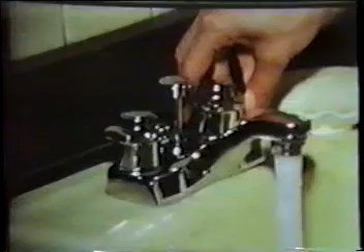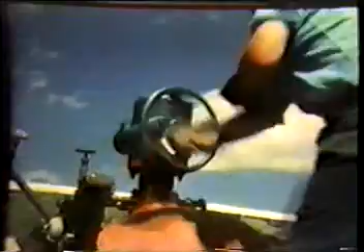Most people are familiar with the annoying sounds of water hammer, the effect of abruptly stopping the flow of water by closing a faucet. In large-sized transmission and distribution pipelines, closing a valve too fast can cause water hammer. The sudden deceleration quickly transforms the momentum of a column of water into extreme pressures in the pipe.

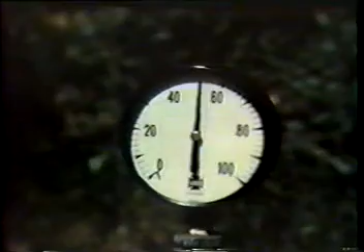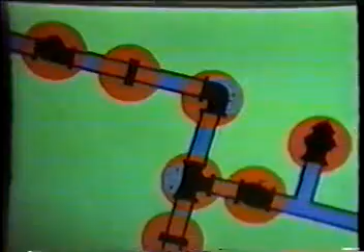This pressure in a pipe system can damage pumps, couplings, thrust blocks and elbows, pipe walls, valves, boilers, hydrants. In fact, the system can be subjected to stresses greater than its designed structural capacity, its ultimate strength. This applies to all kinds of pipe materials: cast and ductile iron, steel, asbestos cement, concrete, and plastic.

Water hammer is the concern of those who stand to gain the most from the elimination of such effects. The contractor, who must meet the specifications and who wants the least uncertainty in his installation. The owner, who as guardian of public funds wants the most value and maximum system effectiveness for the taxpayer's dollar. And the engineer, whose reputation depends on good system design.

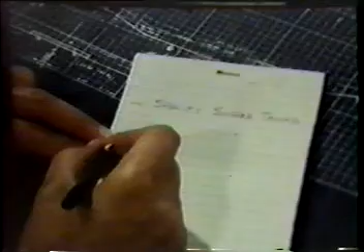Often the engineer will make analyses of the possible effects of water hammer on the system. When he does, he either designs adequate strength to withstand surges, or he reduces the magnitude of the surges by specifying control devices, such as surge tanks, at appropriate points in the system. When a valve is closed, the water flows into the tank, relieving the surge.

Entrapped air can cause similar surge effects, but it is not as simple to pinpoint as a cause of trouble because its effects usually don't show up until the line has first been filled for testing. It might take longer than it should to bring the line up to pressure. This is almost a sure indication of entrapped air.

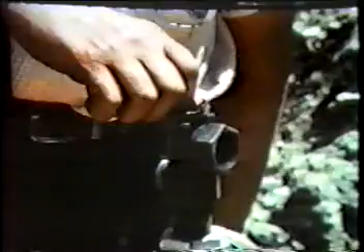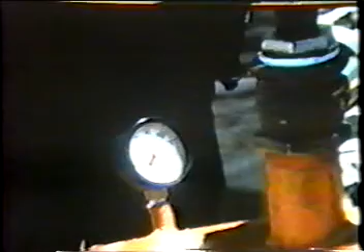When this happens, it's only natural to release the air by opening the air relief valves located at the high points of the line. But if a manually operated air relief valve is opened too wide, it can be dangerous. Suddenly, for no apparent reason in a static line, the pressure may fluctuate drastically. Even if there is no major system damage, the owner might have to accept reduced system capacity if remaining entrapped air has significantly constricted the pipe cross-section.

But the answers aren't always that easy to obtain with the necessary precision. Often the effects seem to put the blame where it doesn't belong, on friction losses or the strength of materials used.

To shed new light on this increasingly urgent problem, Colorado State University, one of the world's largest university hydraulics laboratories, made available extensive test facilities and graduate water resources programs. Here in the hydromachinery laboratory, studies were conducted on the effect of the sudden release of entrapped air in a closed, static system. A candidate for a master's degree with faculty guidance was assigned to the project.

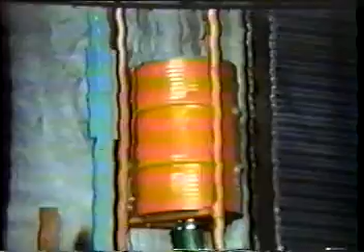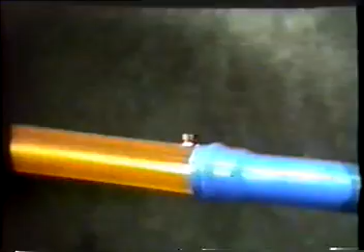A reservoir tank was mounted at the upper end of a laboratory test pipeline. A 4-inch plastic tube connected the reservoir tank to the main pipeline of 4-inch PVC pipe with Ring-Tite joints. For easier direct observation, clear sections of plastic pipe were used near the expected area of turbulence. A Bourdon gauge was placed on the line and a valve for introducing air at the high point.

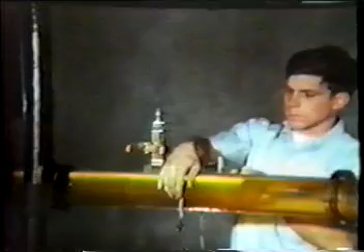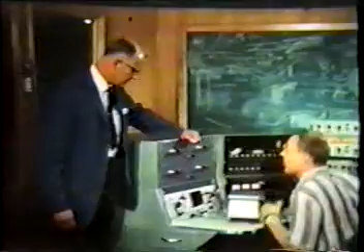Transducers were mounted at 4 points in the pipe wall, capable of sensing and transmitting water pressures electronically. In the nearby console room, fitted with equipment for a wide range of testing, a Moseley recorder was used to trace a permanent record of both positive and negative pressures.

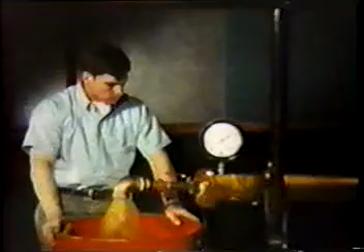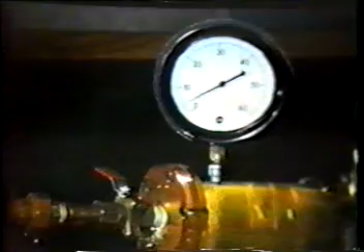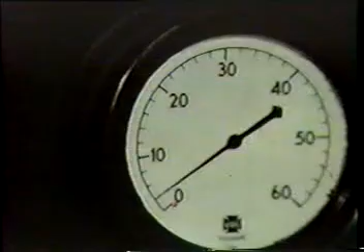First, as a control demonstration, classic water hammer was achieved with water flowing through the system. Rapid closure of a quick-acting ball valve set up surges generating heavy stresses in the pipe wall. Violent changes in pressure, first positive, then negative, reached 15 times the original pressure before normal damping out occurred. The high-pressure shock wave passed back and forth several times, causing alternate tension and compression stresses. As predicted by theory, the maximum water hammer pressure was directly proportional to the initial velocity.

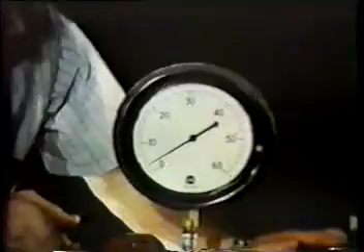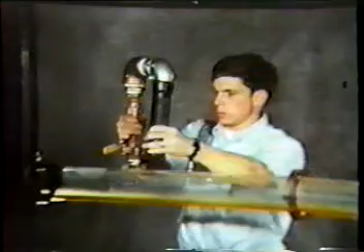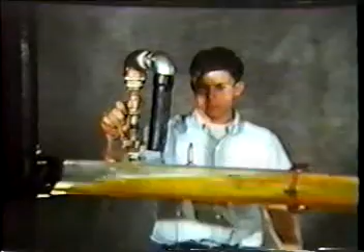Next, the flow was stopped to set up a static situation in a closed system similar to that during field testing. Air was then injected to form an air pocket at the high point of the line. The static pressure showed as a steady trace on the Moseley recorder. A deflecting elbow was installed to drain off escaping water. Then, the air was released as quickly as possible, with the air relief valve wide open, to generate a surge that indicated a rapid conversion from a static to a dynamic situation.

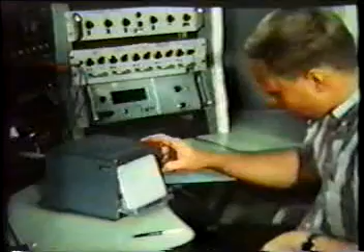At the point, and all along the line, the pressure waves generated resembled those of classic water hammer. This water hammer effect is produced when the air is exhausted, because the water, with 800 times the density of the air, cannot escape at anywhere near the velocity of the air escaping through the valve. Therefore, the water essentially comes to a sudden stop after filling the former air pocket and sets up pressure surges back and forth in the line. The surge pressure is directly proportional to the deceleration of the water column. At higher initial pressures, typical of field requirements, variations of this magnitude could easily generate pressures greater than the design strength of a water pipe system.

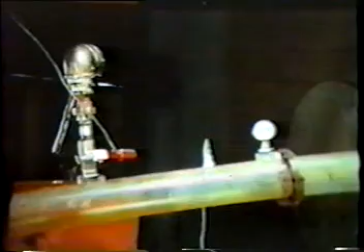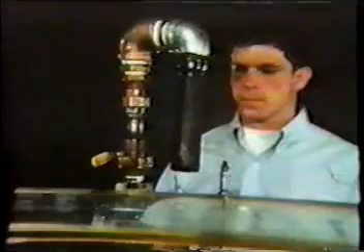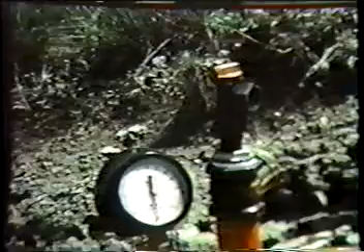Then, the tests were conducted at a higher initial pressure, in this case, 15 psi. Again, the air was released suddenly at maximum valve opening, with greatly intensified effects along the line. The recorder showed drastic fluctuations around the higher static pressure. Under the same conditions, the stresses were substantially reduced simply by releasing the air more slowly with a smaller valve opening. Obviously, this would be a good procedure in the field, where far larger pressures are the rule, particularly if the relief valves are manually operated. The far less violent surge was also evident on the Moseley trace.

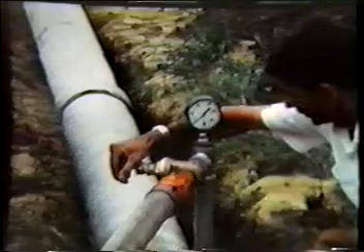The results generally conform to theory and will form the basis of more detailed knowledge for measurement, prediction, and allowance for this phenomenon in pipeline system design. This would also mean more precise recognition of the effects of air entrapped in pipelines, so that the effects could be reduced or virtually eliminated for practical purposes. But first, it is important to know the possible sources of the entrapped air. One obvious source is the air in the pipeline before the line is filled. Often, economic analysis and trade-offs during the design stage will indicate that automatic air relief valves are the most economical in the long run, assuring trouble-free operation.

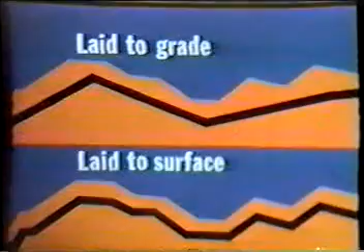It can also be recommended that wherever possible, the pipe should be laid to grade. This might mean a larger initial installation cost, but it has several advantages. Instead of many high and low points of surface-laid pipeline, the fewer high points can be definitely located when the pipe is laid to grade. Fewer air relief valves will be needed, and there will be less possibility of trouble from entrapped air. Even if no air is present initially, it is important to remember that over a period of time, air may come out of solution as temperatures and water pressures fluctuate, causing air pockets to grow and restrict flow.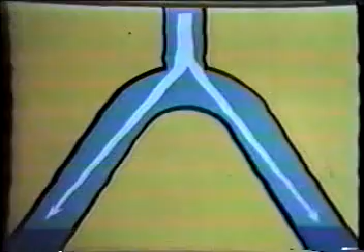In a similar and more obvious manner, air can enter the line if vacuum relief valves are installed. These valves help prevent water column separation in the event of power failure, but make no provision to get the air out when normal pressures are resumed. This is one more reason why automatic air relief valves are desirable in system design.

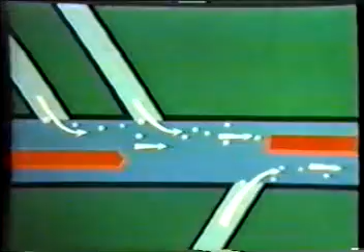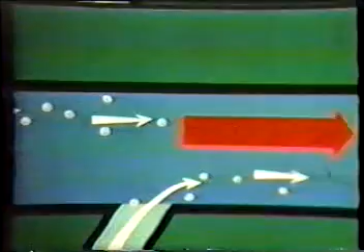Other sources of air in the pipeline come from the flow of water through the line. Sometimes distribution lines or other adjacent lines contain air, which can enter the transmission line, especially when velocities are high. Sometimes these smaller lines are helpful, acting, so to speak, as surge tanks to cushion water hammer effects. But again, there must be provision to relieve this entrapped air.

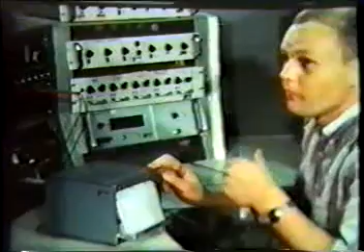Mounting air relief valves at the start of downhill grades may be only partially effective, as air can tend to collect in pockets on the downhill grade at higher velocities. These pockets should be vented by several outlets located on the downgrade. Many of these effects and solutions have been known for some time. Their importance, however, to the performance of a pipe system is now being realized, as testing facilities give more precise measurements of the effects.

These important ventures measure only one parameter of pipeline performance: the effective release of entrapped air from a closed system. It is important to remember that there are other problems beyond this that should be scientifically scrutinized to improve pipeline design and performance. Among these are power and pump failures, air column separation, and field testing techniques.

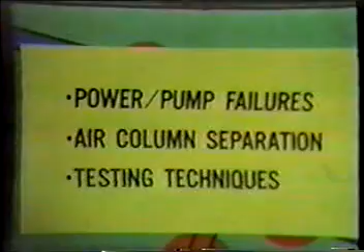All are promising subjects for subsequent study and more valuable information for the pipeline industry. The results of further studies will have many practical benefits for the owners, design engineers, and contractors who have so much to gain from perfected pipeline performance. For this project, we have with us Dr. M.L. Albertson.

As you may remember, an earlier study of the dynamic effects of releasing entrapped air from pipelines led to three important recommendations for minimizing pipeline damage. Number one, we should use automatic air release valves at all high points where air might accumulate. Number two, we should lay pipe to grade wherever possible to eliminate unnecessary high points. Number three, we should remove air slowly before we subject a pipeline to final test pressures in order to avoid water hammer damage.

Now, these are very important general conclusions, but we needed to extend our quantitative knowledge to help improve our field testing techniques. For example, during field testing, what is the proper rate of filling? We know that air should be released slowly, but how slow is slowly? How about transient pressures, which we know from previous research can be far greater than they should be when air is released improperly?

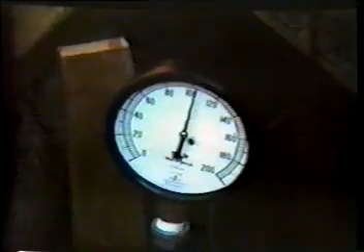We wanted to know more about the effect of different sizes and types of air release valve. It was questions like these that led us to believe that a project studying field testing would be of value, particularly since no systematic data were known to exist on this subject. Jim Andrews, a candidate for a master's degree, chose to make this the subject of his thesis. This film, which you are about to see, is a record of that project.

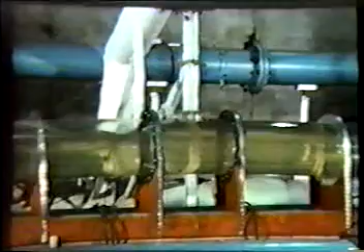This is one of the many pressure pipeline tests made under controlled laboratory conditions, part of the overall research project. To explain its objectives, let's take a quick look at some of the hydraulic forces involved. When a pipeline is filled and the air is released at a high point in the line, the density difference between the escaping air and the incoming water causes the water to decelerate rapidly when the water reaches the riser or valve exit, which has a smaller diameter than the main line pipe. This is because the less dense air escapes 28 times as fast as the water.

A high pressure wave is generated by the piling up of the denser incoming water, causing an impulsive force as it is slowed. We are concerned with the changes in pressure, delta P in the formula, that might be expected from various rates of filling. In the formula, the change in pressure, ΔP, equals the density of the water, Greek letter rho (ρ), times the wave speed, small a, times the change in velocity of the incoming water, ΔV: ΔP = ρ·a·ΔV.

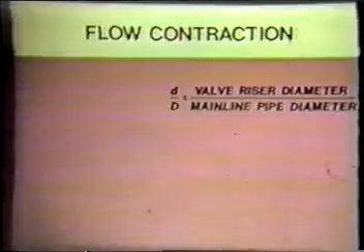The pressure differential, delta P, is affected by several variables. The primary variable is the velocity of the water approaching the high point. Another important variable is the slope of the pipeline at the high point. The degree of flow contraction is determined by the ratio of the diameters of the riser, small d, to the main line pipe, big D. The sizes and types of air release valves were also variable. These then were the leading variables included in this study.

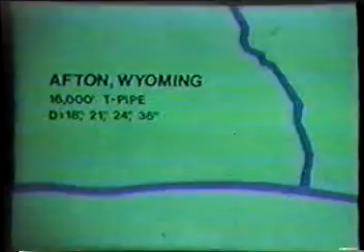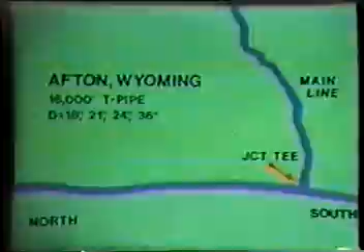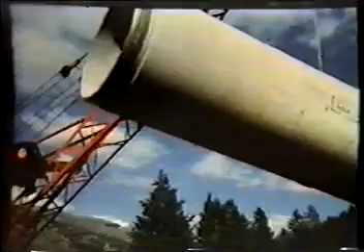The pipeline chosen for field testing was being constructed near Afton, Wyoming. A total of 16,000 feet of large diameter transite transmission line was installed. This low pressure system tapped a snow-fed mountain stream for an irrigation project of the United States Soil Conservation Service. Good installation practices helped reduce the possibility that test results would be distorted by random factors.

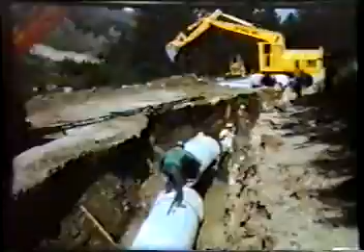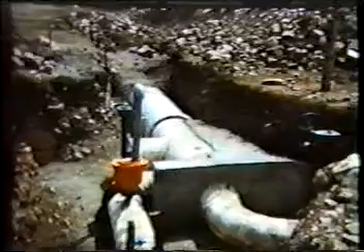The 36-inch mainline pipe, 4,105 feet long, drops 200 feet. In the completed line, water enters this diversion structure at the top and runs down through the line to the valley below. The main line divides at a junction tee into two smaller lines. Design specifications included a heavy thrust block at the junction and automatic air and vacuum release valves.

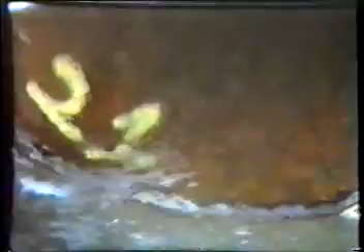The researchers studied the relationship of the rate of filling to the test pressures as part of an attempt to develop a valid formula for use in field testing. One of the most important results of the study was the record obtained of transient pressures, particularly the changes during initial filling. Altogether, there were 5 test stations, including this important one at the junction tee.

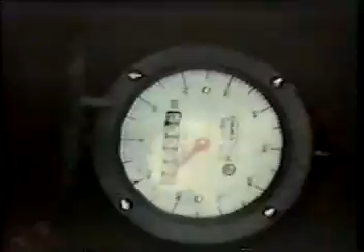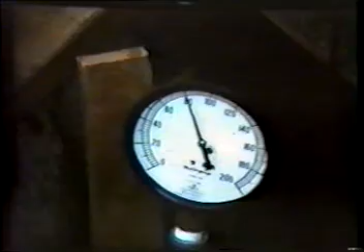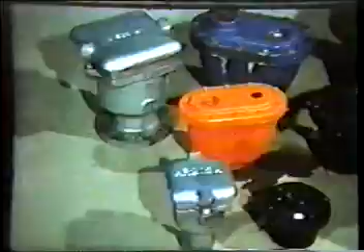In addition to measurements of filling pressures, artificially induced transient pressures were recorded as they moved up and down the line. It should be emphasized that this is not necessarily recommended as a field test procedure. After the field test data were analyzed, we decided that more information was needed on the closure characteristics of the air and vacuum release valves used. A number of these valves were obtained from leading manufacturers and tested in the laboratory.

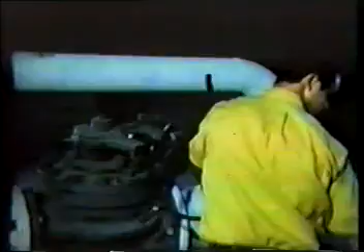For a valid field testing situation, we used standard 12-inch asbestos cement pipe with the riser and valve exit at the high point. Filling velocities were carefully controlled by a plug valve and measured by an orifice meter. Transducers provided continuous pressure recording at points located 1 foot away and 26 feet away from the high point.

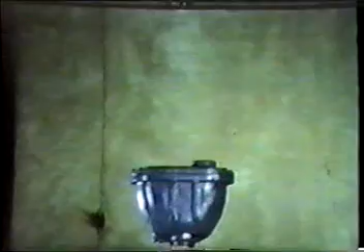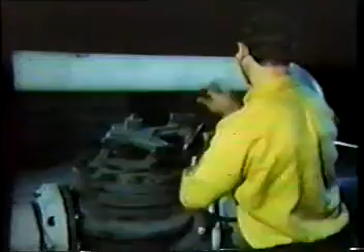In this typical filling test, a 2-inch APCO combination air and vacuum release valve was used at filling rates of 2 feet, 4 feet, and later at 8 feet per second. The rate of flow was established by adjusting the plug valve to pressure readings taken on either side of the inlet orifice, translated into velocity measurements.

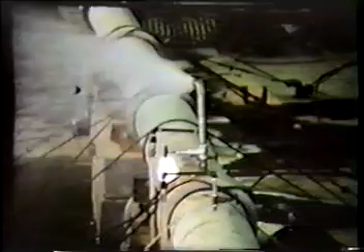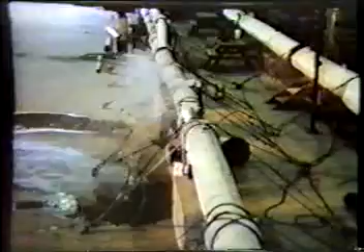Another series of tests used different risers, not fitted with air and vacuum release valves. In these tests, the 1-inch riser gave fairly consistent results. The 2-inch riser was less predictable. Even at the lowest test flow rate, 2 feet per second, the transient pressures varied widely due to the dynamic water hammer effect of the air and water mixture escaping through the riser.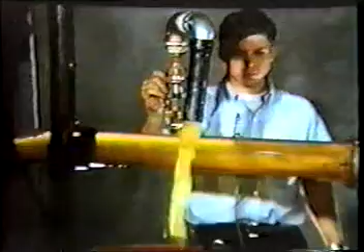From our research, we concluded that 2 different types of transients can occur. As shown in this earlier study, the first type is associated with exhaustion of air pockets from manual release ports. This type of transient pressure has a rapid pulse, which may be localized near the air release port. The governing variables seem to be the degree of flow contraction, or small d over big D ratio, also the distribution of air in the pipe.

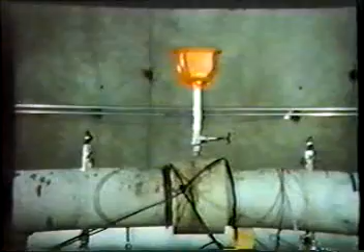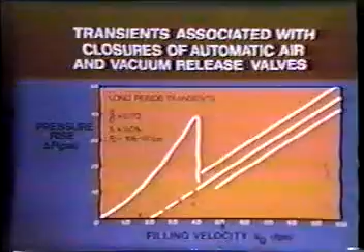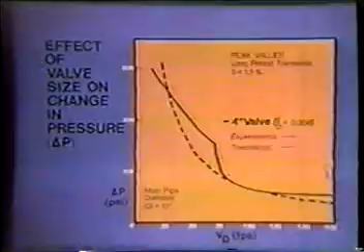In this study, we found that the second type of transient pressure associated with automatic air and vacuum release valve closures has a more typical water hammer wave, which travels the length of the pipeline. In these tests of automatic air release valves, a pronounced peak in the ratio of pressure change to filling velocity was observed near a rate of 4 feet per second. In general, we found that the pressure rise increased with larger valve size and riser diameters, but valve types made little difference.

To sum up, we continue to consider the period of pipeline field testing, particularly during initial filling, to be the most critical in the lifetime of the pipe. This is because the mixture of air and water introduces a large number of variable and transient forces that are not present at any other time. Colorado State recommends that an analysis of the variables and water hammer potential associated with pipeline filling be included in design engineering calculations.

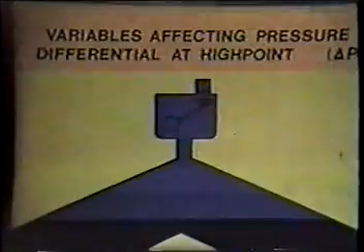A safe filling velocity should be specified, slow enough to avoid transient pressures that would cause damage. At the present time, our recommendation is 1 foot per second or less. The following recommendations may also help to avoid excess pressure changes during filling. Equip the line with automatic air and vacuum release valves. We prefer the continual acting types that permit additional air release after the main valve is closed.

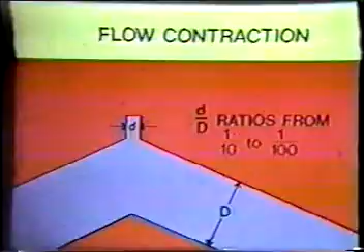For safe flow contraction, assuring that the incoming water following the escaping air to the valve exit will decelerate within safe limits, we recommend low small d over big D ratios falling in a range of 1/10 to 1/100. These tests are preliminary and are being promulgated for interim reference until more complete results are obtained. The data gathered in this project will be published in useful form for the further guidance of the engineering community and the pipeline industry.